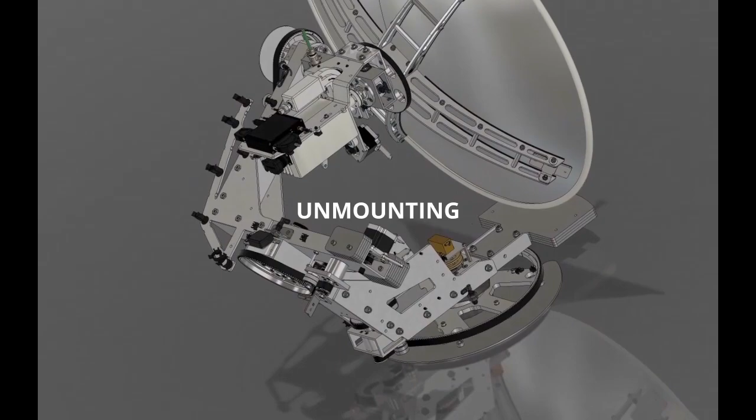Loosen and remove the SMA connector on the left-hand side using an 8mm open-ended spanner. Do the same with the SMA connector on the right side.

Now loosen the sub-D connector on the right-hand side. To dismantle the connector, you have to press the release on both sides of the connector. Now do the same with the sub-D connector on the left-hand side.

Now remove the last connector from the BUC box. To do this, turn the bayonet catch counterclockwise. If you cannot loosen it by hand, you can use the polygrip pliers.

Now loosen and remove the N connector from the LNB using a 19mm open-ended spanner. Loosen and remove the military plug by twisting the bayonet catch anti-clockwise.

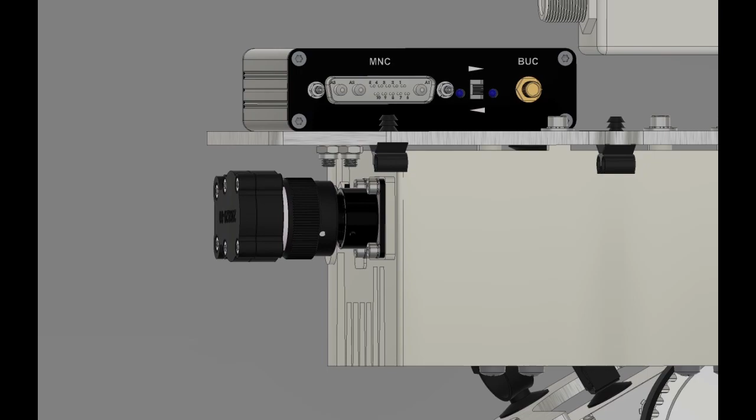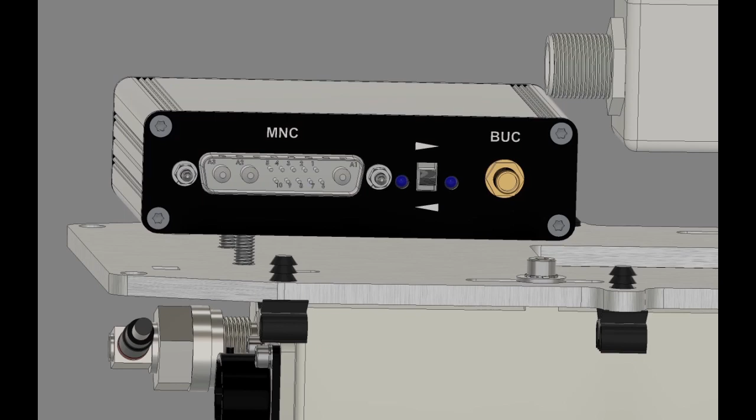Now loosen and dismantle the M5 nut on the left-hand side using an 8mm open-end spanner or a ratchet spanner. Now loosen the M5 nut on the right-hand side. The BUC box must be lifted slightly at the end of the thread to completely dismantle the M5 nut. Now pull the BUC box out at an angle as shown.

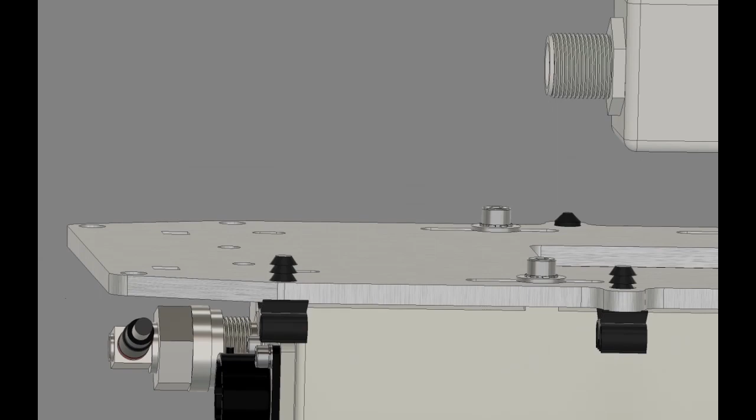Insert the BUC box diagonally as shown. Now tack the M5 nut on the right side. It is important to start with this side, otherwise it will be very difficult to fit the M5 nut there afterwards. Fit the M5 nut with an 8mm open end or ratchet spanner, but do not tighten it yet.

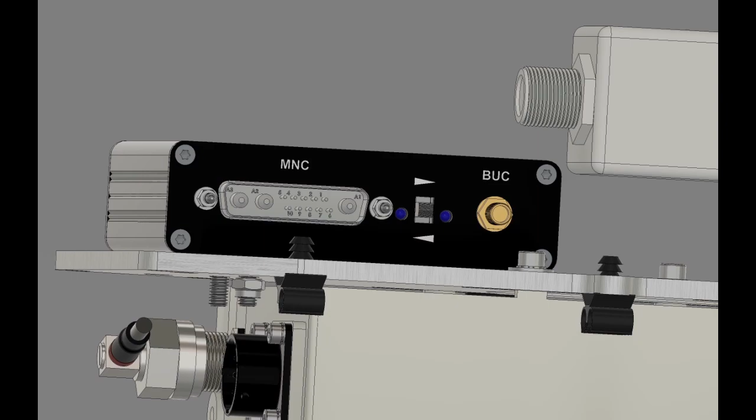Next, fit the second M5 nut and tighten it firmly. Retighten the first nut.

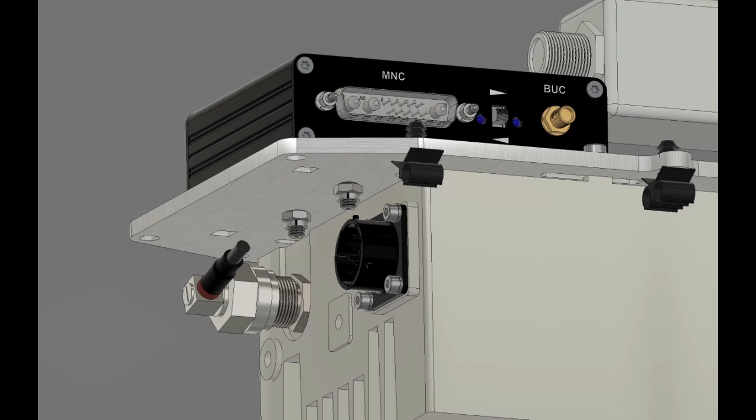If you have a military plug, mount it. Attention! The military plug only fits in one position. It is secured by turning the bayonet lock. To do this, it must be turned clockwise by 90 degrees.

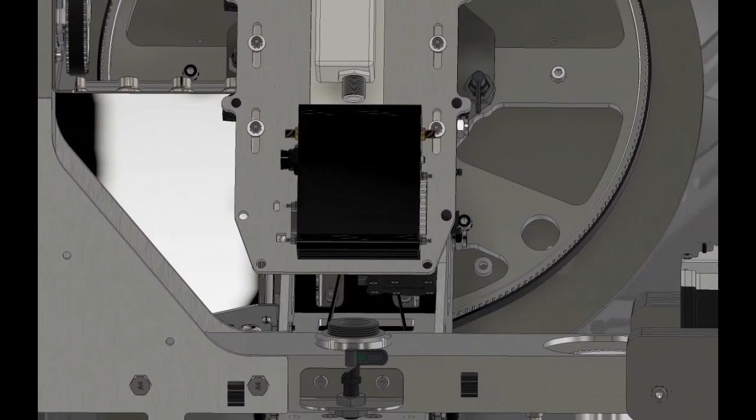Next, the N-angle connector is fitted to the LNB. The N bracket is hand-tightened clockwise. Then tighten carefully with a 19mm open-ended spanner.

Now mount the 2-pole plug for the power supply. This is also secured with a bayonet lock. Turn it clockwise by 90 degrees. Note that the plug has two catches, the first one is easy to tighten and the second one can be tightened with a pair of polygrip pliers.

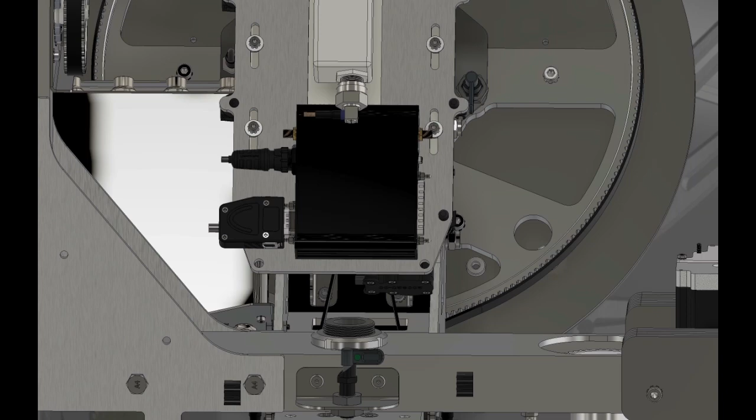Next, plug in the 15-pin sub-D connector, which automatically engages. Now plug in the sub-D connector opposite. This also engages automatically.

Now fit the SMA connector on the right-hand side. Screw it on hand tight and tighten it with an M8 spanner. Finally, screw the SMA connector on the left side hand tight. Then tighten it with an M8 spanner.